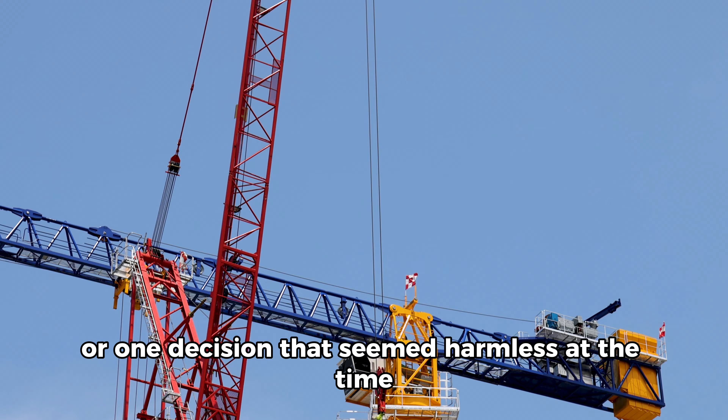Have you ever wondered how a single engineering mistake can destroy years of work? A small oversight, a tiny miscalculation, or one decision that seemed harmless at the time. Sometimes that's all it takes to turn a massive construction project into a billion-dollar disaster.

Every bridge, skyscraper, tunnel, and dam is built on thousands of calculations. Most of them are correct. But when even one critical detail is overlooked, the consequences can be catastrophic. Projects worth millions can fail, lives can be lost, and entire cities can be affected.

Throughout history, engineering failures have shocked the world. Bridges have collapsed without warning. Buildings have begun to sink years after completion. And structures once considered engineering marvels have become cautionary tales. Many of these disasters were preventable, yet they still happened.

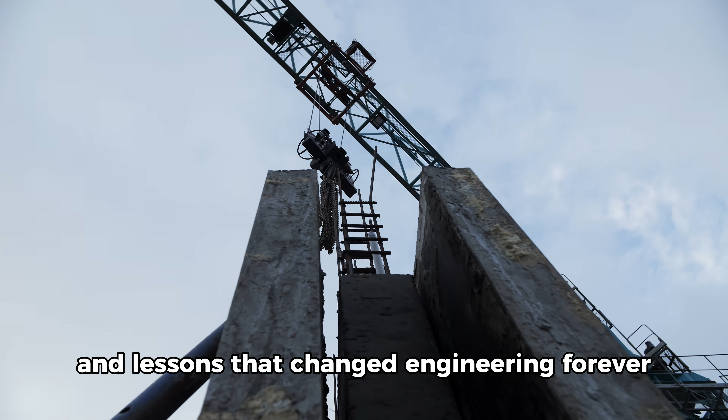Some failures were caused by poor planning, others by unexpected environmental conditions. And some happened because engineers missed a single critical detail hidden deep within the design. The result? Billions of dollars lost, years of reconstruction, and lessons that changed engineering forever.

Today, we're exploring 5 of the most expensive construction mistakes ever made. From collapsing bridges to sinking skyscrapers, these disasters transformed the way engineers build the modern world.

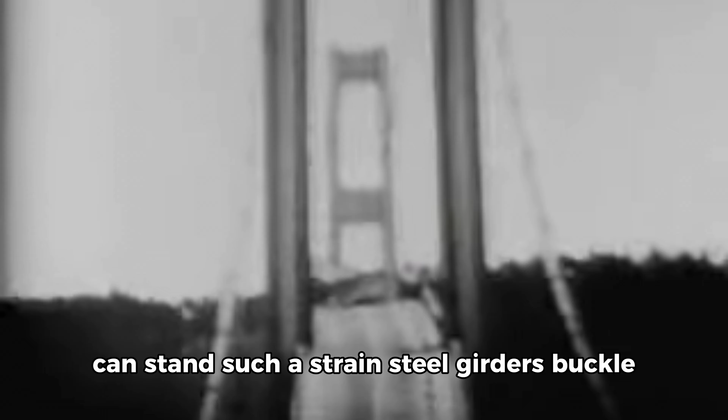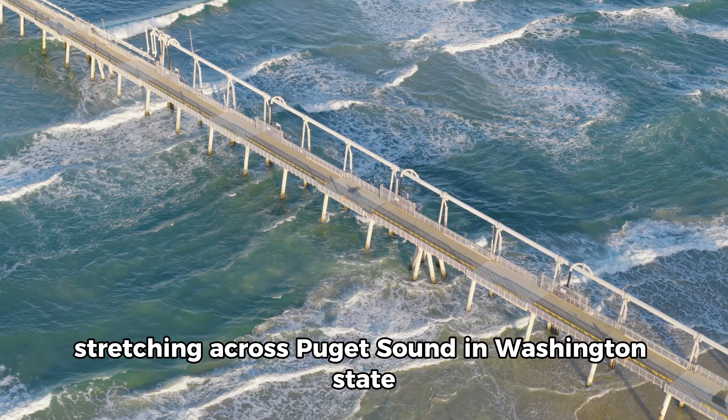Let's begin. On the 7th of November 1940, one of America's most ambitious bridges collapsed into the waters below. The disaster was captured on camera and would become one of the most famous engineering failures in history. Just a few months earlier, however, the Tacoma Narrows Bridge was celebrated as a masterpiece of modern engineering.

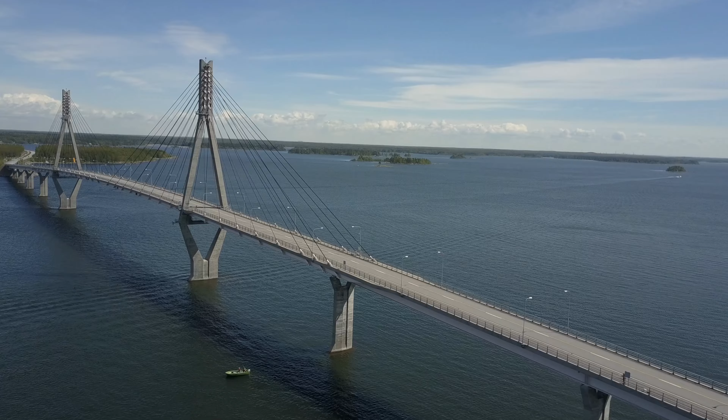Stretching across Puget Sound in Washington state, the suspension bridge was elegant, efficient, and remarkably affordable to build. Many believed it represented the future of bridge design. At the time, engineers were constantly searching for ways to build longer spans while reducing construction costs. The Tacoma Narrows Bridge appeared to be the perfect solution.

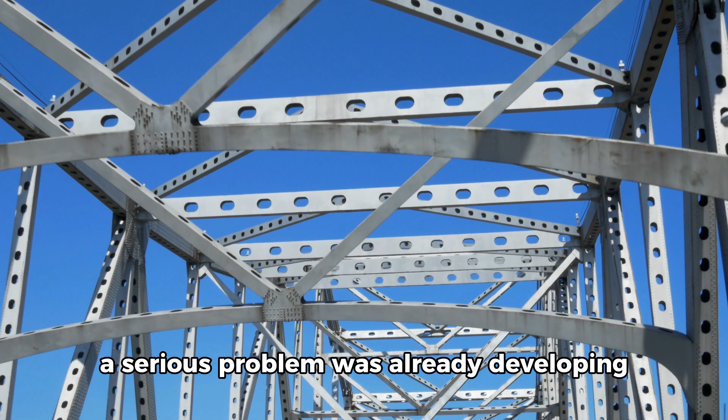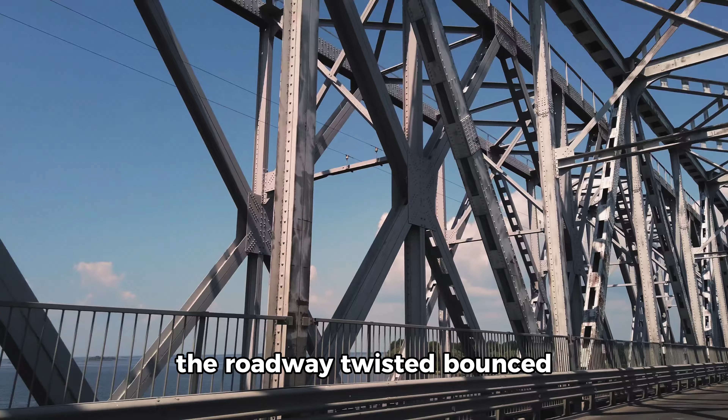Its slender design looked modern and sophisticated, earning admiration from both engineers and the public. But beneath its graceful appearance, a serious problem was already developing. Soon after opening, engineers and local residents noticed something unusual. Even moderate winds caused the bridge deck to move. The roadway twisted, bounced, and swayed in ways that had never been anticipated during the design process.

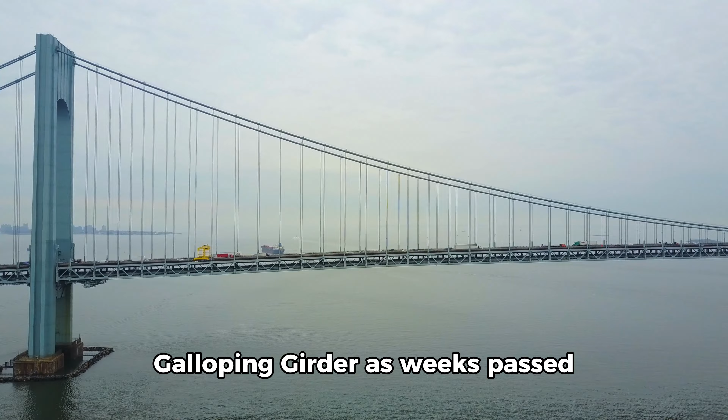At first, the movement seemed almost amusing. Drivers crossing the bridge reported strange sensations, as if they were traveling across ocean waves rather than a solid structure. Some people even crossed the bridge simply to experience its strange motion for themselves. The bridge's dramatic movement quickly earned it a nickname, Galloping Gertie.

As weeks passed, the oscillations became increasingly concerning. Engineers attempted to understand the problem, but the true danger was still not fully understood. Temporary solutions were considered, yet none addressed the root cause of the instability. Then came November 7th. Strong winds swept through the Tacoma Narrows. What had once been a curious engineering oddity suddenly became a disaster unfolding in real time.

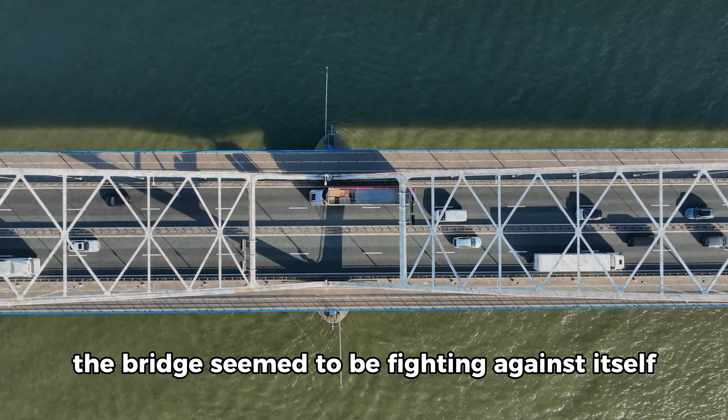The bridge began twisting more violently than ever before. Sections of the deck rose and fell dramatically as powerful aerodynamic forces acted on the structure. Witnesses watched in disbelief as the oscillations grew stronger. The bridge seemed to be fighting against itself. Each movement fed the next, creating a destructive cycle that engineers could no longer control.

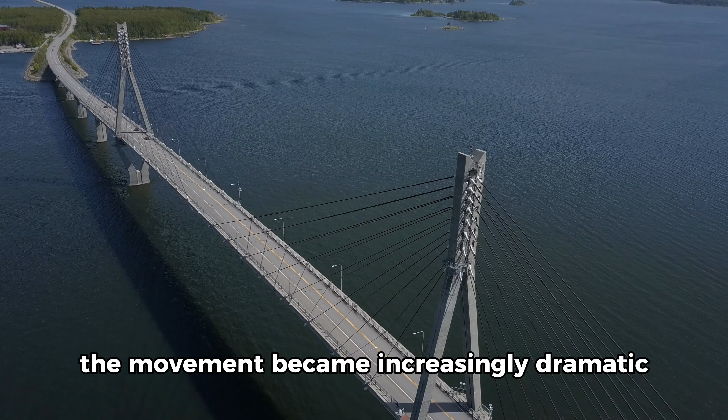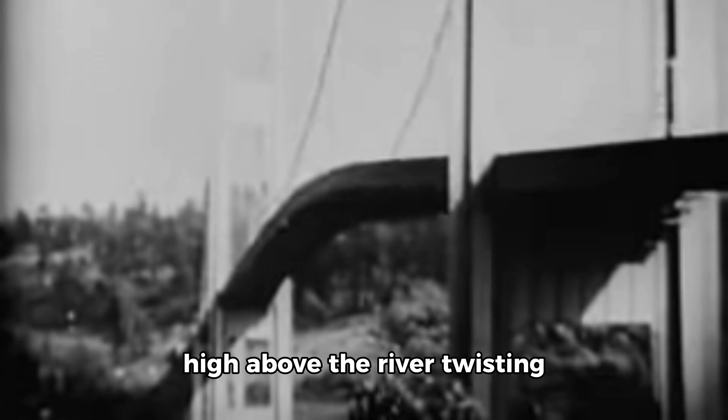As the bridge continued to twist, the movement became increasingly dramatic. Entire sections of the roadway rose and fell several feet at a time. Steel cables strained under enormous stress while the deck bent in ways its designers had never imagined. Photographers and engineers rushed to document the phenomenon. What they captured would later become some of the most famous footage in engineering history.

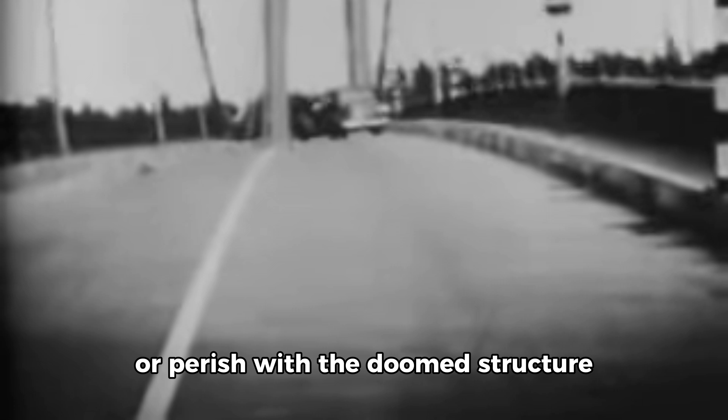The bridge no longer behaved like a rigid structure. Instead, it moved almost like a ribbon being shaken by the wind. Each oscillation transferred energy throughout the span, making the motion even more severe. By this point, it was clear that the situation was no longer under control. Emergency crews closed the bridge to traffic, and observers could do little more than watch as the structure continued to deform under the relentless forces of nature.

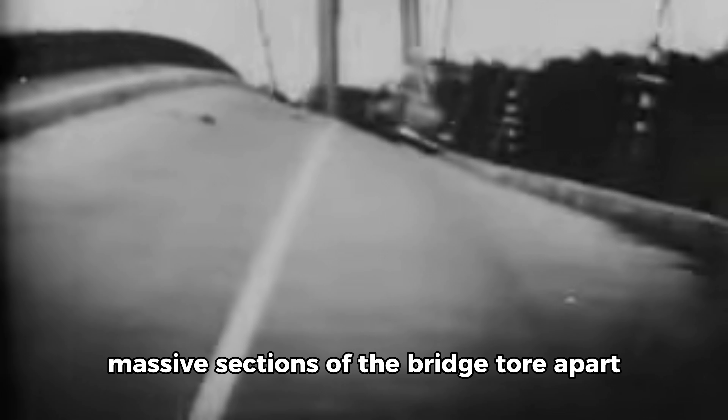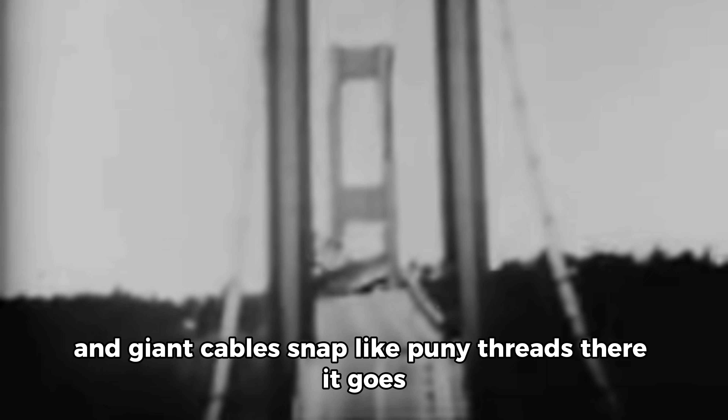For more than an hour, the bridge endured the combined effects of wind, vibration, and resonance. Eventually, the steel and concrete could take no more. Massive sections of the bridge tore apart and plunged into the water below. Remarkably, no human lives were lost. But the bridge itself was completely destroyed. What had once been celebrated as an engineering achievement had become a cautionary tale for future generations.

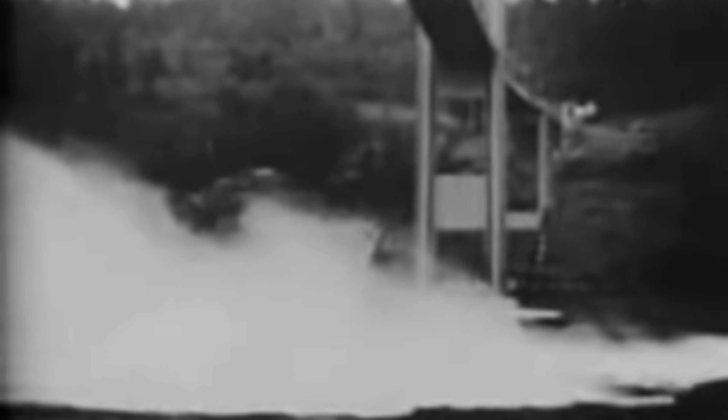The collapse of the Tacoma Narrows Bridge transformed the field of engineering. It revealed the critical importance of aerodynamics in bridge design and forced engineers around the world to rethink how large structures interact with wind. More than 80 years later, the lessons learned from Tacoma continue to influence the design of modern bridges. The disaster remains one of the most studied structural failures in history, proving that even the most impressive projects can fail when a critical detail is overlooked.

Imagine purchasing a luxury apartment worth millions of dollars, only to discover that the entire building is slowly sinking beneath your feet. In the heart of San Francisco stands Millennium Tower, one of the most recognizable residential skyscrapers in the city. Completed in 2009, the tower quickly became a symbol of luxury living. Rising more than 600 feet above the skyline, it offered stunning views, premium amenities, and some of the most expensive apartments in California. For years, everything appeared normal.

But behind the glass facade and luxury interiors, a serious problem was developing below ground. Several years after construction was completed, engineers discovered that the building had begun to sink. Even more concerning, the tower was also starting to lean. At first, the movement seemed minor, but as measurements continued, the numbers became increasingly difficult to ignore. The structure had settled far more than engineers originally expected, and the tilt continued to grow.

Residents became concerned. Property values came under pressure. Questions quickly emerged about how such a modern skyscraper could experience a problem of this magnitude. Investigations eventually focused on the building's foundation system. Unlike some neighboring skyscrapers that were anchored directly into bedrock, Millennium Tower relied primarily on dense layers of soil beneath the city. Over time, the tremendous weight of the structure caused additional settlement, contributing to both sinking and leaning.

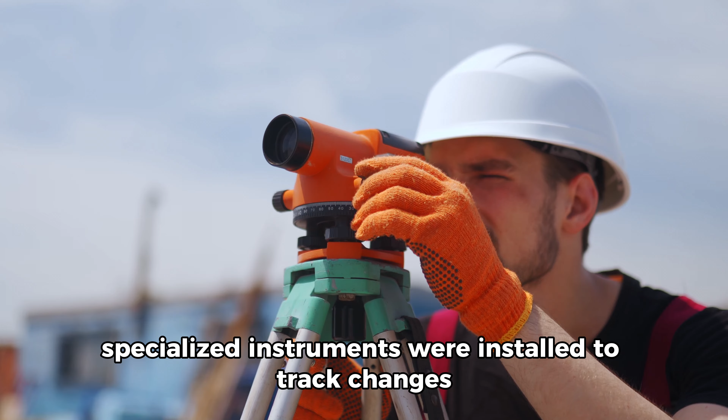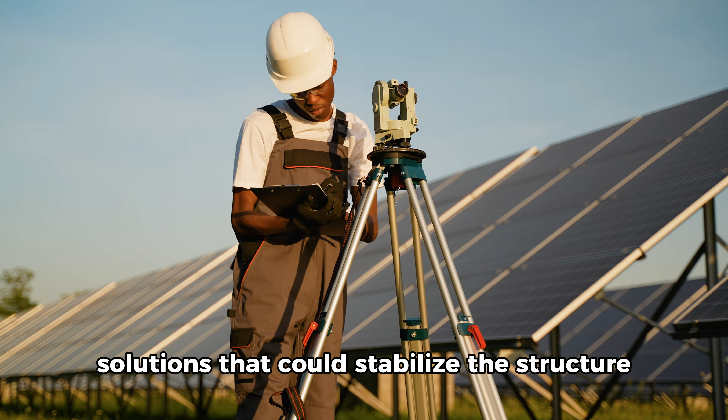As the years passed, engineers closely monitored every movement of the tower. Specialized instruments were installed to track changes measured in fractions of an inch. What seemed like a small amount of movement could have major implications for a building of this size. The situation soon attracted national attention. News outlets across the United States reported on the sinking skyscraper. Legal disputes followed, while engineers searched for solutions that could stabilize the structure and prevent further movement.

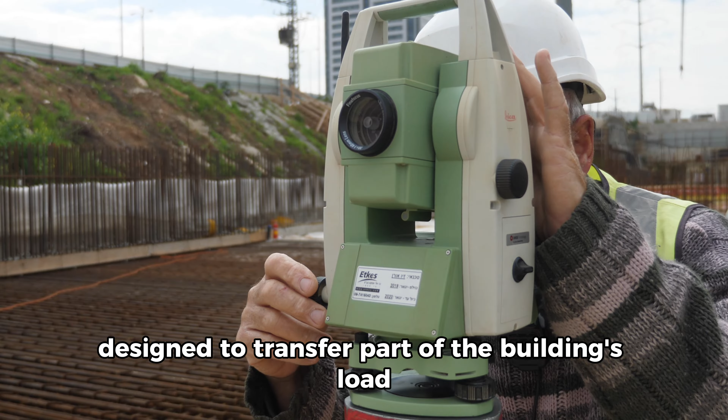Repair plans became increasingly complex. Massive engineering efforts were proposed, including new support systems designed to transfer part of the building's load toward more stable ground conditions. The cost of these projects climbed into the hundreds of millions of dollars. Today, Millennium Tower remains standing and continues to be occupied. But its story serves as a powerful reminder that even the most advanced skyscrapers depend on what lies beneath them. In engineering, the most impressive structure in the world can only be as strong as its foundation. And sometimes, the biggest problems remain hidden until years after construction is complete.

In July of 1981, a celebration inside a luxury hotel suddenly turned into one of the deadliest structural failures in American history. The Hyatt Regency Hotel in Kansas City was considered an architectural success. Its massive atrium, elegant design, and suspended walkways made it one of the city's most impressive buildings. Visitors were often amazed by the open interior space and the elevated bridges that crossed above the lobby.

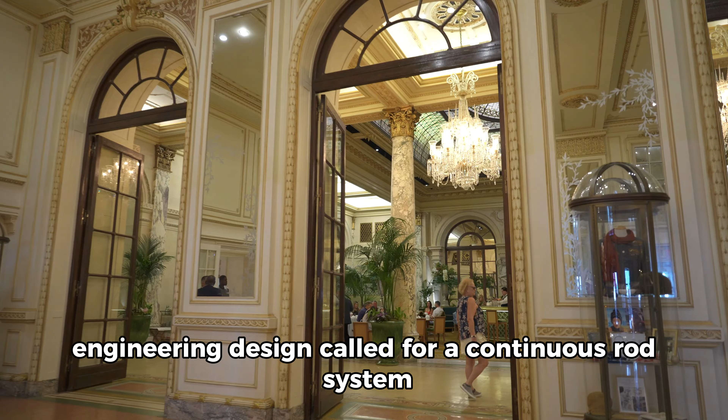On the evening of July 17th, hundreds of people gathered inside the atrium for a popular dance event. Families, friends, and hotel guests filled the lobby, while many others stood on the suspended walkways above to watch the festivities below. Everything appeared normal, but hidden within the structure was a flaw that had gone unnoticed. The walkways were suspended from steel rods connected to the ceiling structure above. The original engineering design called for a continuous rod system that would distribute the loads through the connections.

However, during construction, a design modification was introduced. At first glance, the change appeared minor. The revised design used two separate rod connections instead of a single continuous rod. The modification simplified construction and fabrication, but it also created a dangerous consequence. The new configuration effectively doubled the load acting on a critical connection point. The forces that the connection was required to support became significantly greater than originally intended. Unfortunately, this change was not fully evaluated for its structural impact.

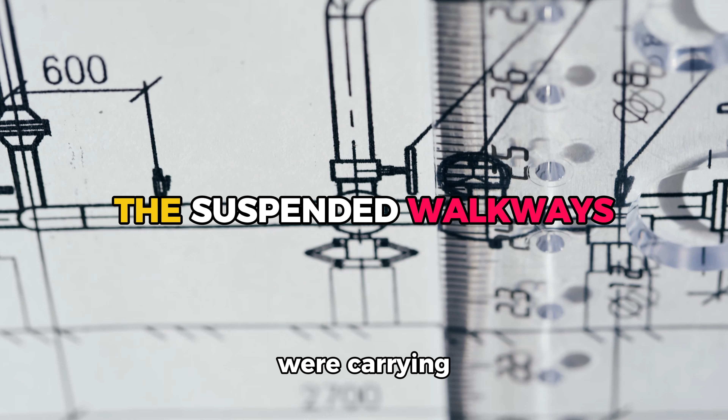The walkways remained in service. Guests continued to use them, and the hidden weakness remained undiscovered. As hundreds of people gathered in the atrium that summer evening, the connections supporting the suspended walkways were carrying far more weight than they had been designed to handle. Then disaster struck. Without warning, the connection points began to fail. The fourth-floor walkway suddenly collapsed.

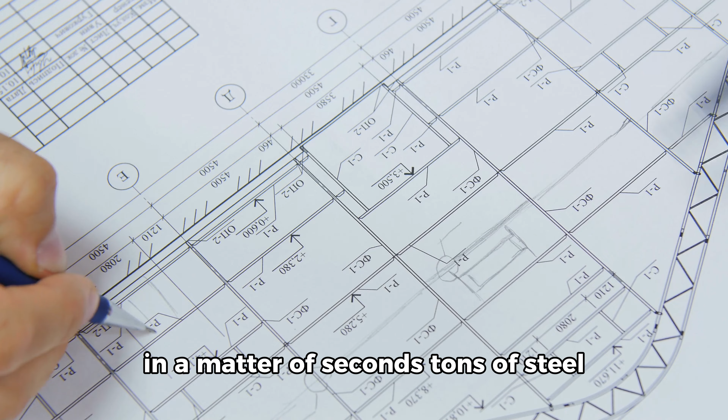Moments later, it crashed onto the second-floor walkway below. The impact caused both structures to fall into the crowded atrium. In a matter of seconds, tons of steel, concrete, and debris came crashing down onto the people gathered beneath. Witnesses described scenes of confusion, panic, and devastation. Music stopped, lights flickered, dust filled the air. Many people initially struggled to understand what had happened. Rescue workers rushed to the scene almost immediately. Firefighters, police officers, medical personnel, and volunteers worked through the night searching for survivors trapped beneath the wreckage.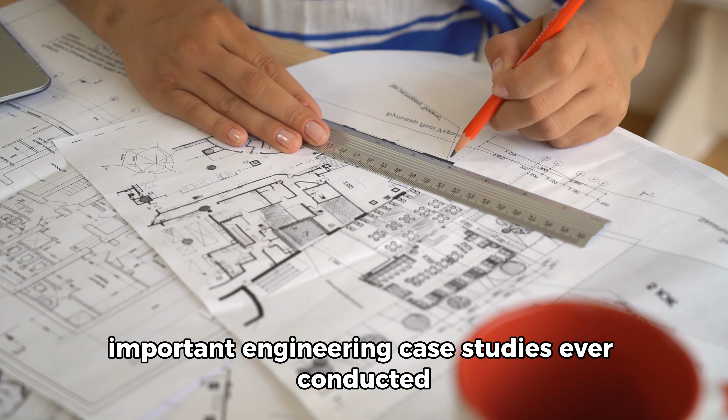The collapse claimed the lives of 114 people. More than 200 others were injured. It remains one of the deadliest structural failures in United States history. The investigation quickly became one of the most important engineering case studies ever conducted. Experts carefully examined design drawings, fabrication details, construction records, and structural calculations to understand exactly why the walkways had failed.

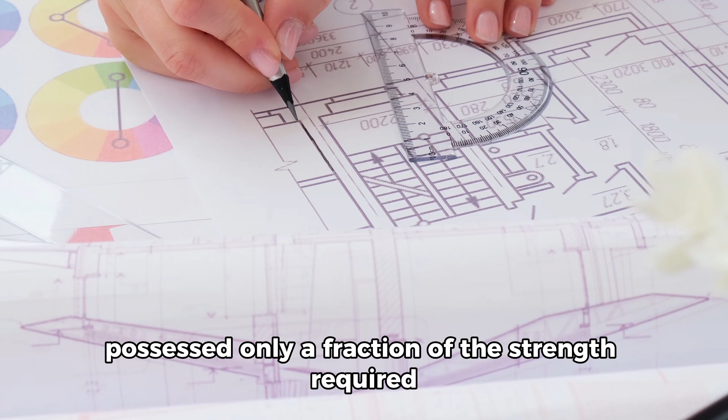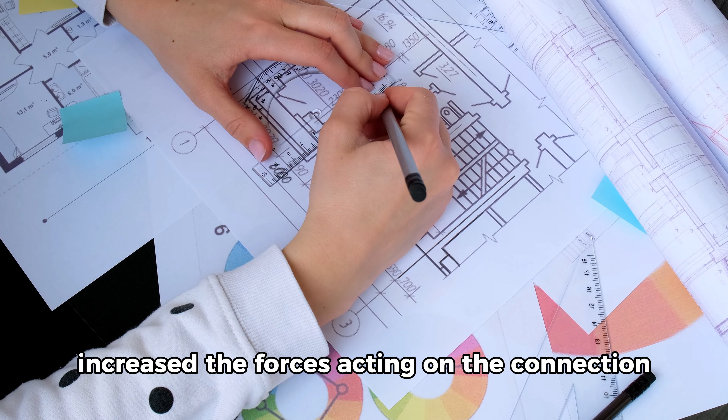What investigators discovered was deeply troubling. The critical connections supporting the walkways possessed only a fraction of the strength required under certain loading conditions. A design modification that appeared simple on paper had dramatically increased the forces acting on the connection.

The disaster demonstrated that structural failures are rarely caused by a single dramatic event. More often, they result from a chain of decisions, assumptions, and overlooked details that gradually create a dangerous situation. In this case, a small change introduced during the construction process ultimately led to catastrophic consequences. Engineers around the world studied the findings closely, recognizing that similar mistakes could occur on countless other projects if proper review procedures were not followed.

The tragedy sent shockwaves throughout the engineering community. Professional standards were reviewed. Design review procedures were strengthened. Engineering ethics became an even greater focus within the profession. The collapse served as a painful reminder that even a seemingly small change can have catastrophic consequences when structural safety is involved.

Today, the Hyatt Regency walkway collapse is studied by engineering students around the world, not because of the size of the structure, not because of its complexity, but because it demonstrated how a single overlooked detail can lead to unimaginable loss. More than 4 decades later, the collapse continues to be discussed in universities, engineering conferences, and professional training programs. It serves as a powerful reminder that public safety depends on the accuracy of every calculation and the integrity of every design decision.

The structures engineers create may stand for decades, but the consequences of an error can last even longer. The Hyatt Regency disaster remains a lasting symbol of why engineering responsibility extends far beyond the drawing board. The disaster remains one of the most important lessons ever taught in structural engineering, a lesson written not in textbooks, but in lives lost. A reminder that every calculation, every connection, and every design decision matters.

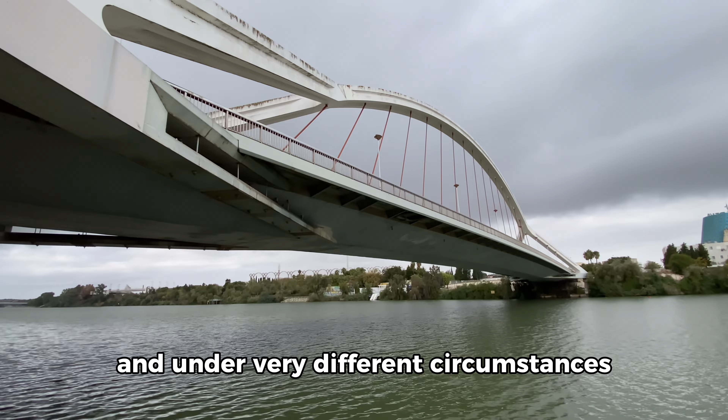The disasters we've explored today happened in different cities, different decades, and under very different circumstances. One involved a suspension bridge that became a symbol of engineering failure. Another involved a luxury skyscraper that slowly began sinking beneath the skyline of San Francisco. And another resulted in one of the deadliest structural collapses in modern American history. At first glance, these stories appear completely unrelated. Different engineers, different projects, different challenges, different environments. Yet when investigators examined what went wrong, a common pattern emerged. In every case, a critical detail was either underestimated, misunderstood, or overlooked entirely.

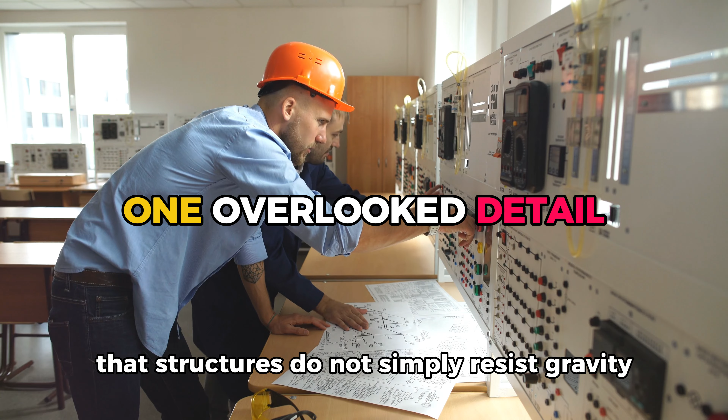The Tacoma Narrows Bridge showed engineers that structures do not simply resist gravity. They must also interact safely with wind, vibration, and the forces of nature. Millennium Tower reminded the world that even the most impressive skyscrapers are only as reliable as the foundation supporting them. The Hyatt Regency disaster demonstrated how a seemingly small design change can produce catastrophic consequences when structural safety is involved.

These failures were expensive. Some cost millions. Others cost hundreds of millions. And some cost something far more valuable than money: human lives. But history remembers these disasters not only because of the damage they caused, it remembers them because of the lessons they left behind. Every major engineering failure changes the profession. Building codes evolve. Design standards improve. Inspection procedures become more rigorous. Engineers learn new ways to identify risks before they become tragedies.

Many of the safety requirements that exist today were developed because earlier generations paid the price for mistakes. In that sense, every failure becomes a lesson for the future. Every investigation becomes an opportunity to improve. And every disaster contributes to safer structures for the generations that follow.

Most people never think about the engineering that surrounds them. They cross bridges without considering the calculations behind them. They enter skyscrapers without thinking about foundations hidden deep underground. They walk through buildings without noticing the countless structural elements working silently in the background. When engineering succeeds, it often becomes invisible. But when engineering fails, the consequences can be impossible to ignore.